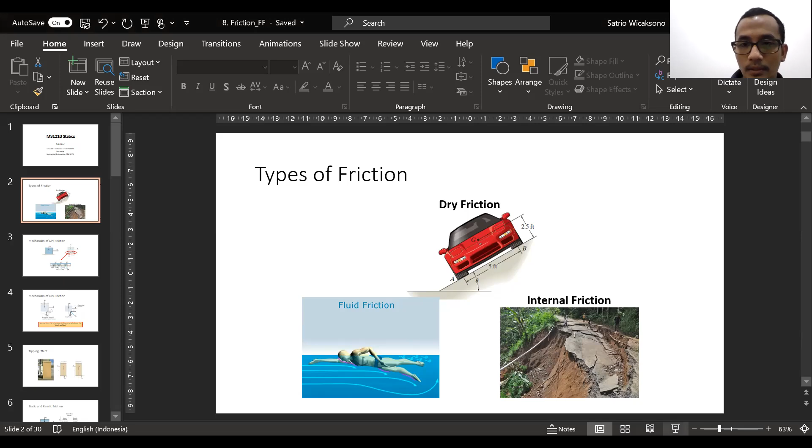About friction, this is one part of things that actually exists in our life, and I believe you have learned about this for quite a while. Friction has been there in our life, and I believe you already learned about friction in your last semesters as well. Correct or not?

In the physics subjects. Hello, Sip? Yes, Pak. Yeah, you're fine. Okay, thank you.

So I believe you have learned about it. Most of the topics about friction have been discussed before in physics class, but today I will start the discussion on friction in more detail regarding things related to the statics problem.

In reality, there are three types of friction, as you can see here: dry friction, which we will study deeper in this particular statics class.

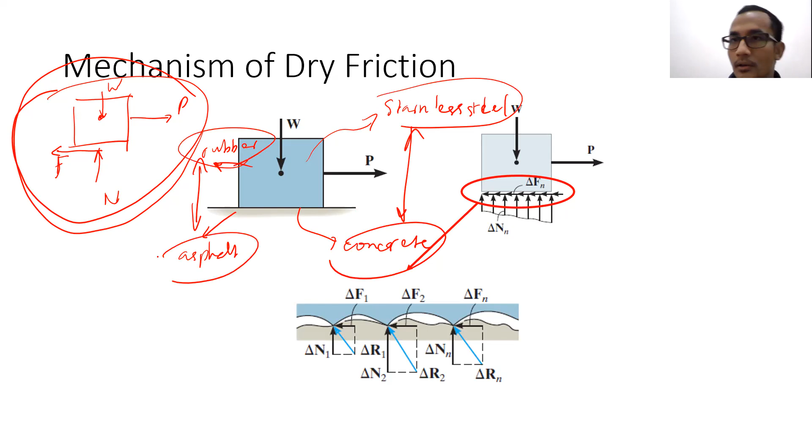Why are those different? Because the interaction between those two surfaces will be different as well. Most of the time, the thing that affects it the most is the roughness of both surfaces.

One material and another material will have different roughness of the surfaces. Stainless steel which receives special treatment on the surface will be different than stainless steel which does not receive any treatment. Because if it's treated on the surface, the roughness can be less than normal, something like that.

So the friction coefficient that you learned before actually depends on the roughness of both surfaces. Besides that, it depends as well on the type of the materials, not just the roughness. So that's the thing that is new in this particular statics discussion on dry friction.

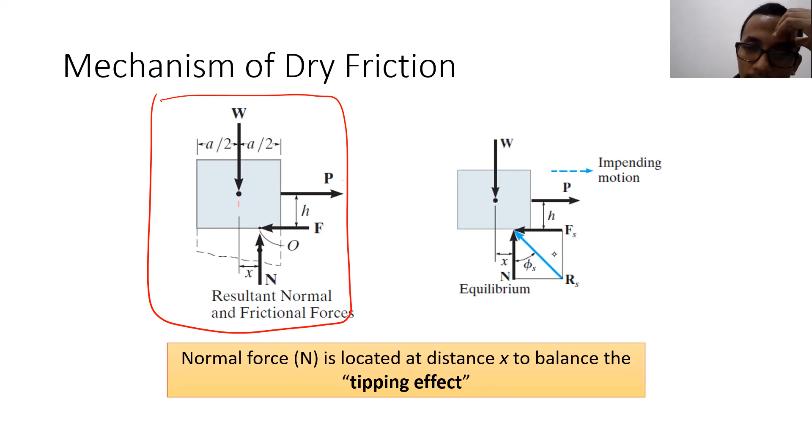Honestly, not yet too much, sir. Which part don't you understand, Ashar? Previously I was in the toilet, I had a stomach ache, so I didn't hear the explanation. I just got back. Oh okay then, so later don't forget to rewatch the video, okay? Okay, sir.

Shabina, do you understand, Shabina? Yes, sir. Okay, good. Okay, I think in that case, I will... Hello, Lalu. Yes sir, I have a question.

I'm not really understanding about the W, and for the W is the weight. Why don't you understand about W? Oh okay, the weight of the thing is always there, right? W is the weight of the thing, it's always at the center of gravity, right? Oh yes, sir. So previously, what you learned before, W is in the middle, in the center of gravity, then normal force in the middle as well, because everything is happening at one point, but that's not really happening.

So what is really happening is like this. W will be in the shape of a concentrated force, and then P, the pushing and pulling force, will be a concentrated force. But when we talk about normal force or friction force, it's actually a distributed force. Both are distributed forces. The normal force distribution is like this, vertically.

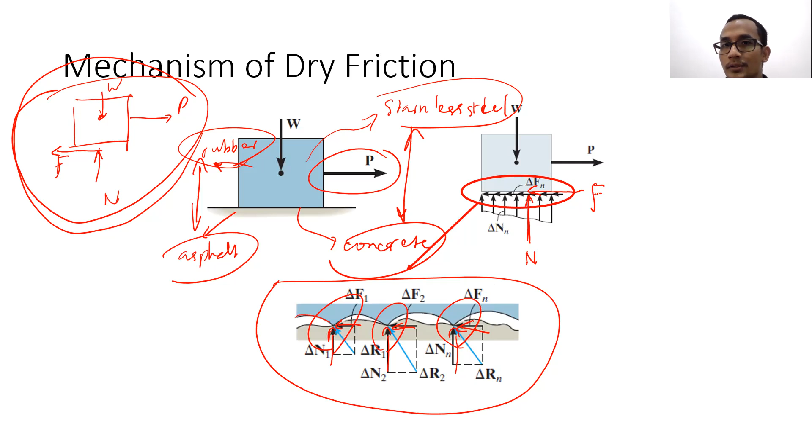How do we find the location of the normal force? That's the question, right? The answer is by using moment equilibrium. The normal force here, in real condition, when you give a pulling or pushing force, the thing does not tip over, like what I showed you just now. If it's not tipping over, it means that the moment caused by the force P and friction force will be neutralized by the moment due to the weight W and the normal force N.

By doing all the calculation, you will be able to find the distance x, with the condition that distance h is known, P is known, W is known. Using sigma fx equal to 0, friction force will be equal to P. Using sigma fy equal to 0, normal force is equal to W. And using sigma moment, you will be able to get this x distance.

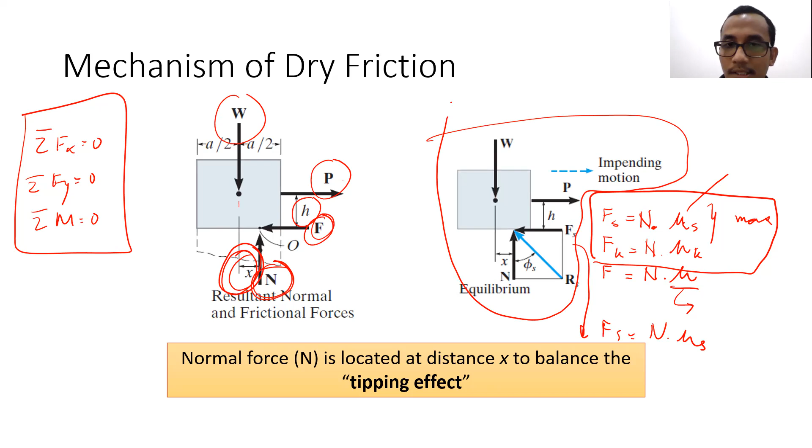Fs and N, we can get the resultant Rs, and Rs will have an angle, φs here, which will have a direct relation to mu s, which later I will teach you guys. But even though without doing so, you can still analyze the friction force or normal force individually without doing it like this, because you can put it as one resultant for friction force and normal force, but if you want to separate it, you can as well. And it is much easier to solve all the things by separating both.

Any question about this? No? Okay, in that case, I will just continue.

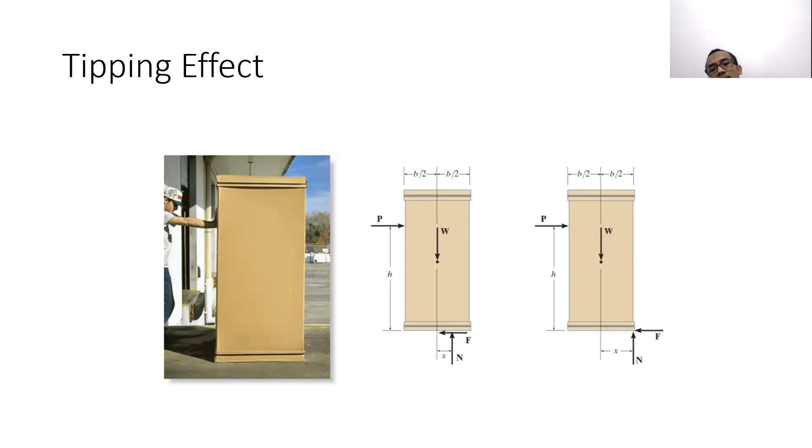So this is one of the examples of the tipping effect. Later I will put this on one of your homework. You can see here, as you can see here, there is one person who pushes the box like that.

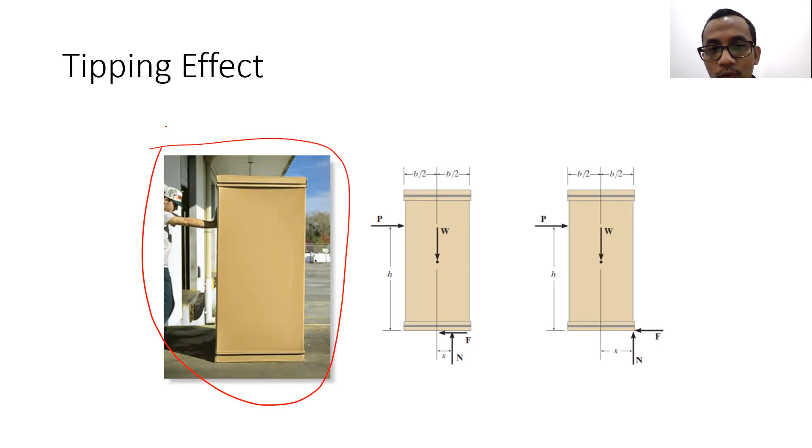There is one person who pushes the box like that. And if we want to draw the free body diagram, the pushing force here we can represent as P. And then the weight of the box will be happening at the center of gravity. And then there will be a normal force at x distance, and then there will be a friction force like that.

The moment due to P here, because the height here is supposed to be known from the problem — the moment due to P and friction force will have to be neutralized by the moment due to W and normal force here. So if H is known, we can calculate for X.

So for the moment, you can see that P and F will create a clockwise moment, W and N will create a counterclockwise moment, so it's supposed to cancel each other out. And in order to calculate distance X there, it will be very simple because we have two couples. The first couple is this, and the second couple is this.

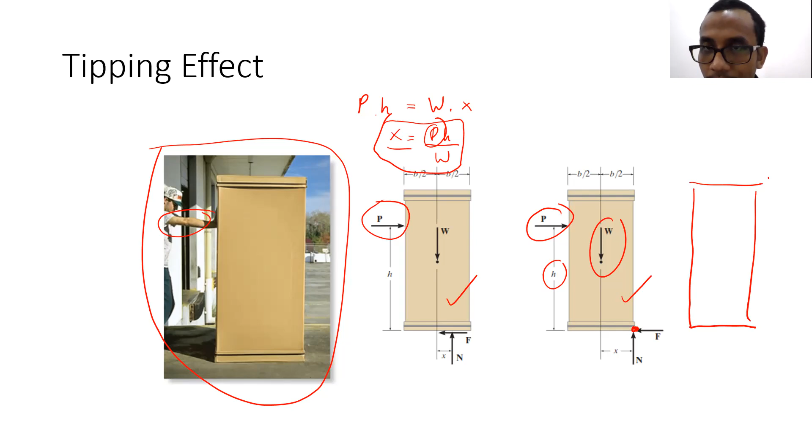And if I have to draw another one: this is P, this is W, P with a certain H, this is the center, and after that you find out that the normal force is here. So the friction force is supposed to be there as well.

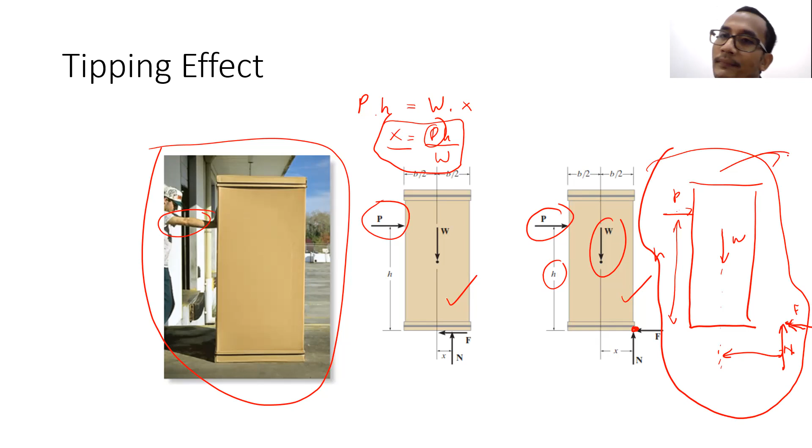It's not possible, because the X is too big, for example. Because of that, after you calculate and the condition is like this, it means that it's actually tipping over. This one is the tipping over condition, because this one is not possible. So the maximum is this one — this is impending tipping.

Any question about the tipping effect here?

As you can see here, the tipping effect will depend on the magnitude of the force P — when it's getting bigger, the possibility of it tipping over will be bigger as well. The value of W: when the weight is getting bigger, the possibility of tipping over will be less. And the last one is H: when the height of the given force is higher, the possibility of tipping will be higher as well.

Any question here? No, sir. Okay.

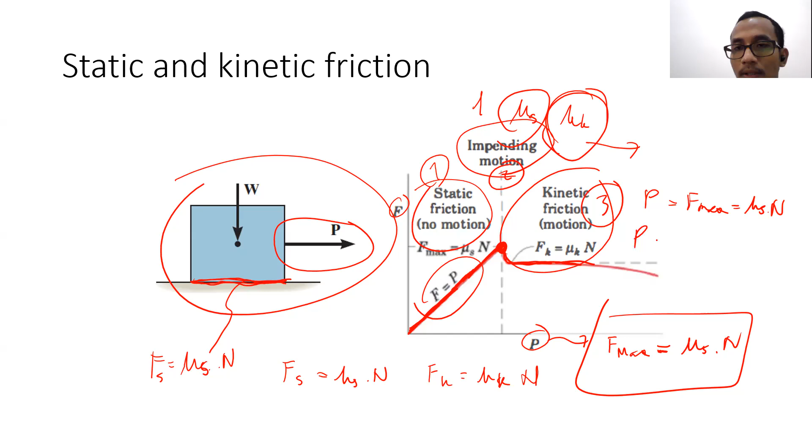The value of P is bigger than the friction force which is happening, where the friction force follows this equation: equal to mu k multiplied by n. About these 3 conditions, anyone want to ask a question?

Pak, so impending motion is the motion just before moving and tipping over, yeah? No, this one is impending tipping. Oh okay, so this one is impending tipping. So you have to differentiate it.

This one is because of the moment equilibrium. The calculation of the moment equilibrium will cause the normal force and friction force to happen exactly on the edge. So it's impending tipping, just before tipping happening.

But this one is impending motion, just before motion happening. When impending motion happens, the condition of impending motion is that the pushing or pulling force is the same value as the maximum friction force, mu s multiplied by n.

If the free body diagram is like this, okay, because sometimes later the free body diagram will not be exactly like this, the P can be slightly slanted. In that case, the equation will not be F equal to P. So we have to calculate for that. But basically, impending motion means that the friction force which is happening is the maximum friction force, equal to mu s multiplied by n.

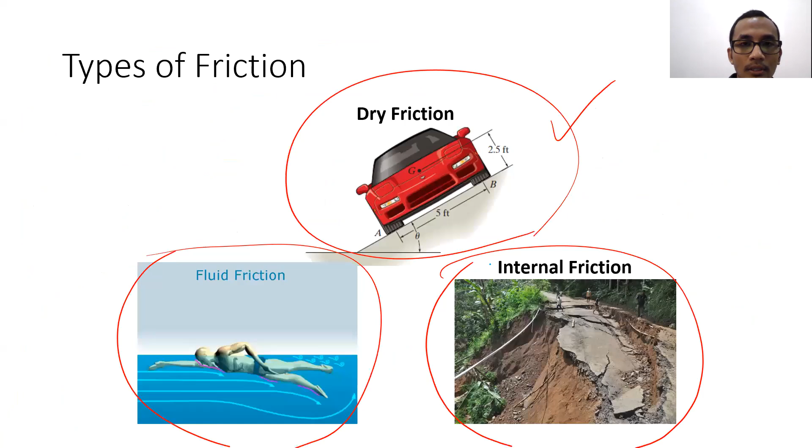So only those three conditions. And how to handle those three conditions, we can practice more. So this is the basic theory, all the basic theory about dry friction. There are several things that you must know.

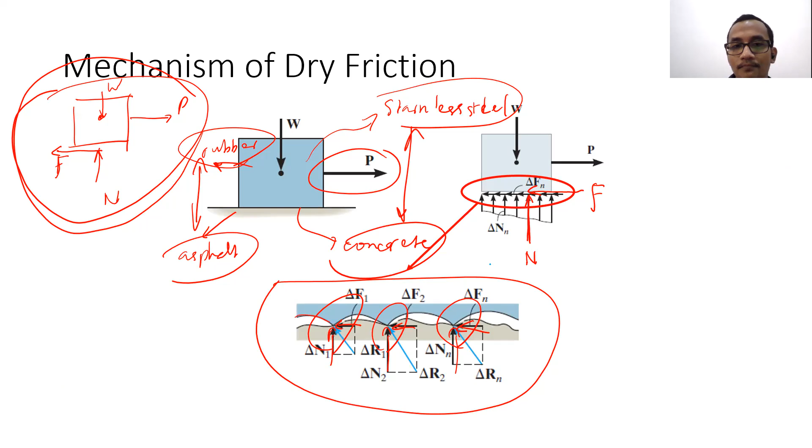Why will the friction force and the normal force not be happening at the center? It's mainly because the normal force distribution and friction force distribution will not be constant. It will be linear, close to linear, with slight randomness.

How to represent that? We can represent it as a concentrated force at a certain distance from the center. Here, the distance is x. And in some conditions, because the ratio is certain between friction force and normal force, we can represent both with resultant force R at a certain angle.

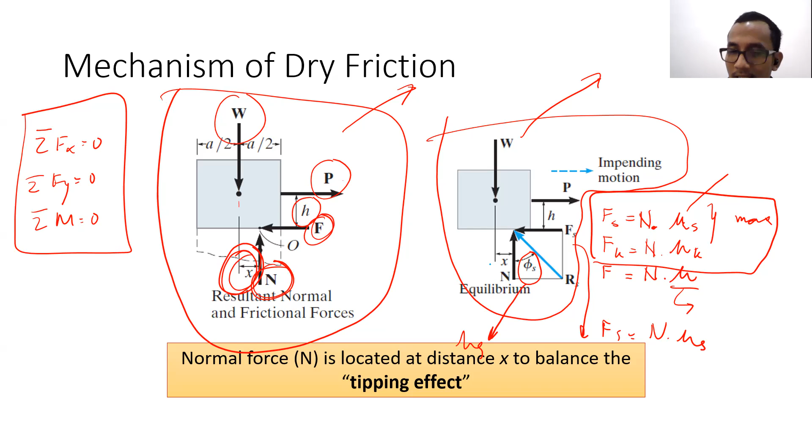And then you must know as well about the tipping effect. So when you give a horizontal force like that, the normal force will be shifted with distance x from the center.

But when P is getting bigger, or H is getting bigger, or W is getting lower, the normal force will be shifted again toward O, and the maximum it can be shifted is until it reaches O. This particular condition we call impending tipping.

When tipping is about to happen, because we cannot increase the value of P anymore, or we cannot increase the height of P anymore. But if you keep increasing P values or H value, the friction force and the normal force will be outside of the base, and it will not happen.

So what really happens is it will tip over in that condition. This condition is the tip-over condition, when friction force and normal force are outside of the base.

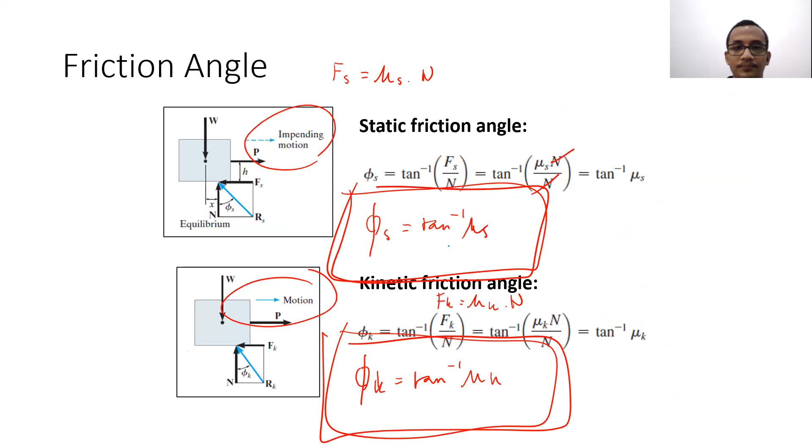Besides that, if we talk about the impending motion or motion condition, the ratio between the friction force and the normal force will be certain, following this for impending motion and this for motion. But without doing it like this, we can still be able to solve the problem. I think that's all about the theory behind dry friction.

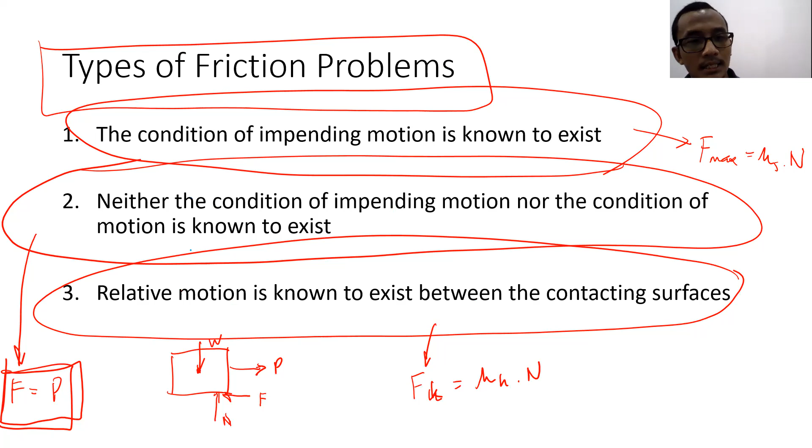If you have any questions, you can ask me now before I discuss the problem examples.

For impending motion, impending tipping motion - it only applies when Fs equals P.

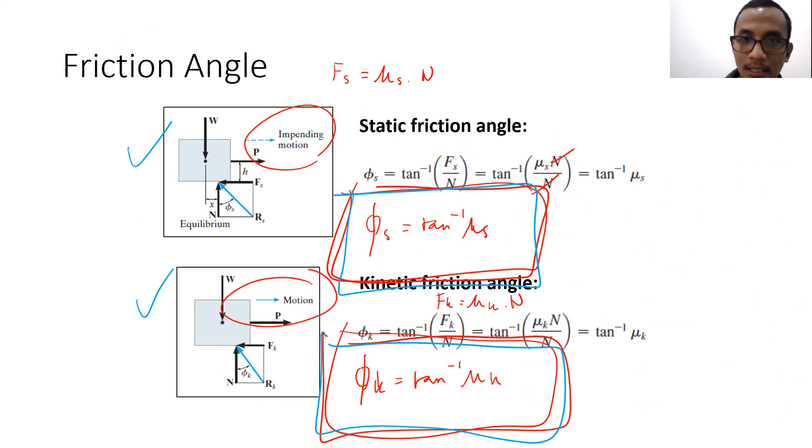Not necessarily. We can combine conditions. When P is very small, it will be in the second condition. When P is big enough, there is a possibility it will be in impending motion condition. But when P is too big, there is a third condition, the same as when you are pushing a wardrobe or box like that - if you push it with enough force, it will move.

But not necessarily will it move. Sometimes in some conditions, instead of moving, it will tip over, right? Do you get it, Matthew?

Yes, sir, but how do we calculate? There are several analyses you have to do here. You have to check whether it will tip over or not, and at the same time check whether it will move or not. Tipping over condition and moving condition are separate things, but sometimes you have to do them at the same time.

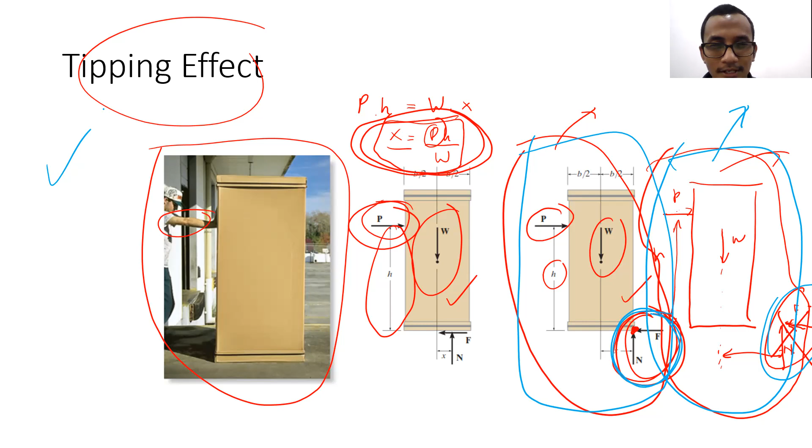For example, in the problem the information given could be that the condition is in static equilibrium, or the equation condition is that it's actually moving. You understand, right? Understand, sir, understand.

Tipping and this static and kinetic friction are two separate things. Something can tip even if it is not in the impending motion condition. So it's not necessarily connected like that, but sometimes you have to handle both at the same time - tipping effect and motion effect.

So when we talk about friction, there are two kinds of effect. The first is tipping effect, the second is motion effect. The motion effect will affect the value of the friction force. The tipping effect will determine whether it tips over or not. Do you get it, Matthew?

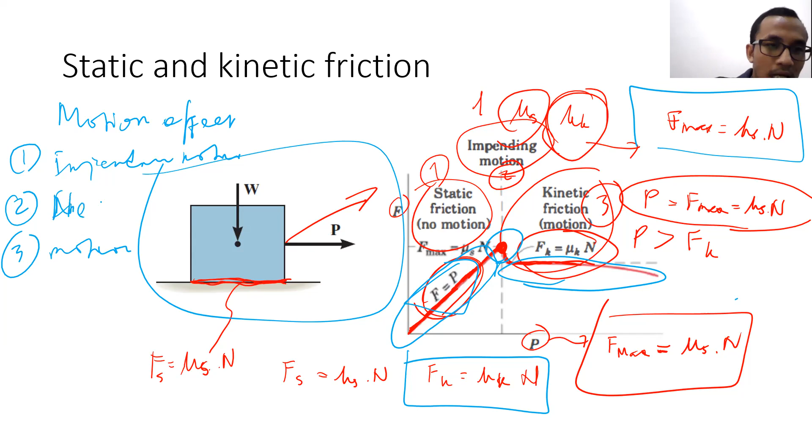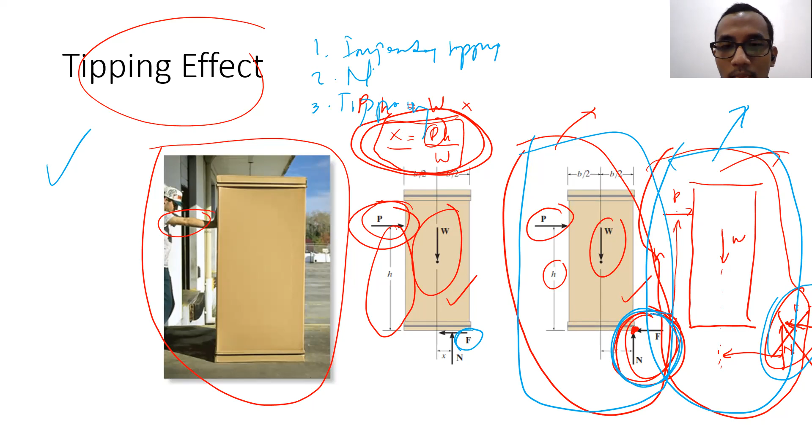Then there is a tipping effect as well, which means it's in a static equilibrium condition, impending tipping, or tips over. There are three possibilities as well for the tipping effect. Two is no tipping at all. One is impending tipping. Three is tip over or tipping. Two is neither impending tipping nor tip over - it's like this, this is number two.

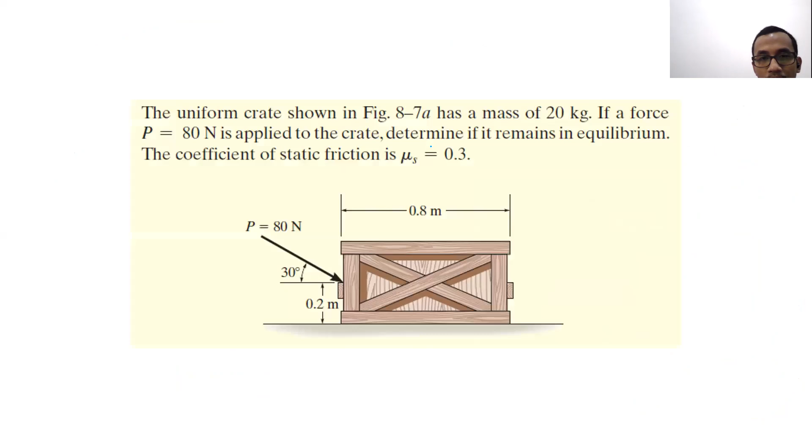There are several problems that we can use as an example. I think I will start with the easiest one. So I think I will just stop this one here.